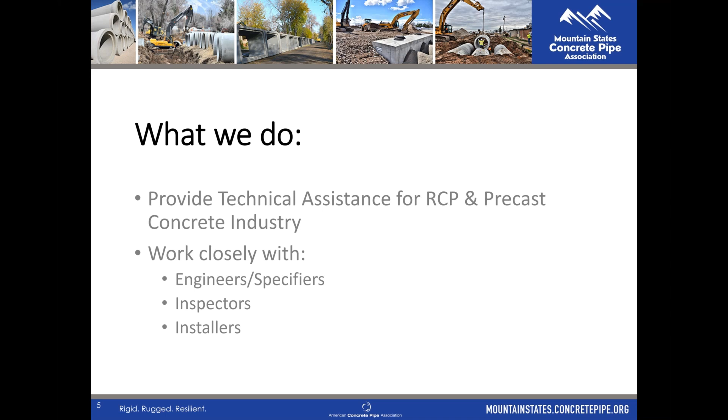We do this by giving presentations at conferences. We've been doing these webinars, and we also do in-person lunch and learns and everything. Another thing that we do is we'll review and write specifications. If you have any specifications that you think would benefit from having us take a look at it, we'd be more than happy to do that. Please reach out to us and let us know.

We also answer a lot of constructability and design questions. Sometimes I'll get a lot of phone calls of, oh, we only have like 12 inches of cover - what class of pipe, how would we do that? What would you recommend we include in the specifications in these low cover situations? It's always nice to be able to provide that information and suggestions on what to keep in mind. We want to make sure our products are being installed correctly and to the best of the contractor's ability, so we want to make sure they're doing that right. We're here to answer those questions and help you.

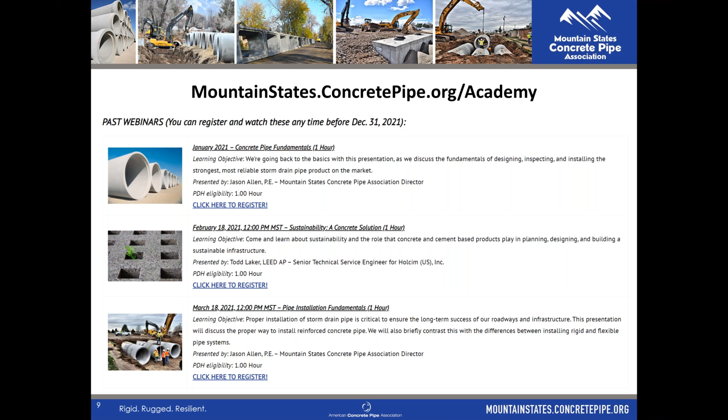So that's a really cool thing there. Before I turn the time over to Jeff, I wanted to give some fun facts about him. I like to do this with all our presenters. The fun fact I have about Jeff is he's the closest I've ever come in person to the real Ron Swanson. He embodies a lot of the values of one of my personal heroes. If you've spent time talking to Jeff, he shares a lot of views with Ron Swanson, including his love of bacon and breakfast foods. So I was going to ask what talents and traits you see in common, Jason. He loves his liberty, his guns, and his breakfast foods. Not so much the mustache though, you got a little work to do on that mustache, Jeff, but it won't be nearly that thick, I can tell you that.

I've actually been in a restaurant where it was almost played out word for word, like the scene from Parks and Rec where Ron Swanson says, 'Bring me all the eggs and bacon you have.' Stop. What you heard was, 'I want a lot of eggs and bacon.' What I said was, 'Bring me all the eggs and bacon you have.' I've actually witnessed Jeff do that at a restaurant. Sounds about right, yeah, loves his eggs and bacon.

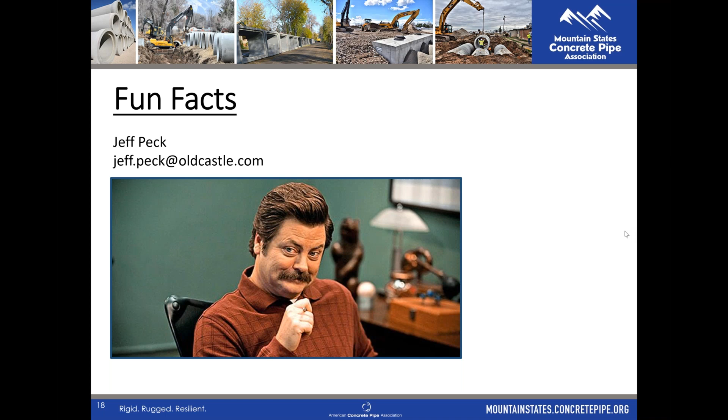Okay, so let's see if we can get this sharing right. Looks right, good to me. There it is. What do you know? Right to me. We got through it.

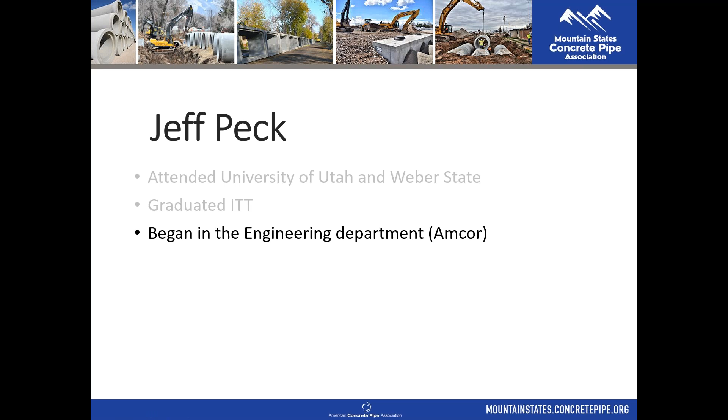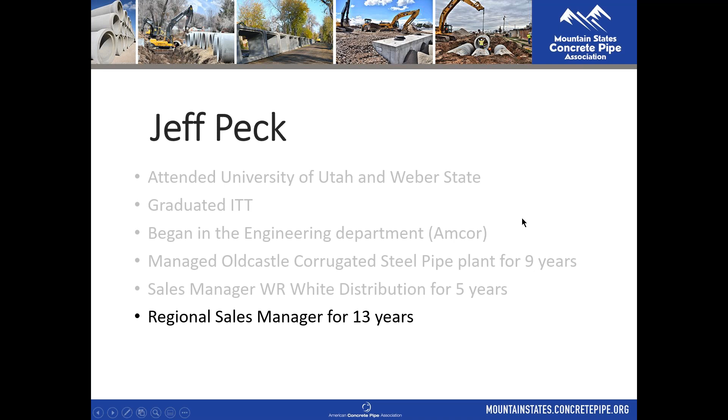My name is Jeff Peck. I attended University of Utah and Weber State, we'll leave BYU out of the conversation, we'll talk about that later. Graduated from ITT, started with Amcor. There may be some of you old enough to remember Amcor. Began in our engineering department, moved through inside sales and things like that. Actually got the opportunity to manage our corrugated steel pipe plant for 9 years, down in North Salt Lake. Many of you didn't know we had that, but I've got quite a bit of experience with corrugated metal. Then we bought W.R. White back in 2000, and I helped manage the distribution side, where we sold HDPE, PVCs, ductile iron, hydrants, fittings, all the waterworks side. So I've got quite a bit of experience with those products as well, and have been regional sales manager for Oldcastle Infrastructure in the Rocky Mountain region north for the last 13 years. So that's just a little bit about me, and I guess I missed the references to Ron Swanson, or I would have put some of my own bona fides there to be equal to the task.

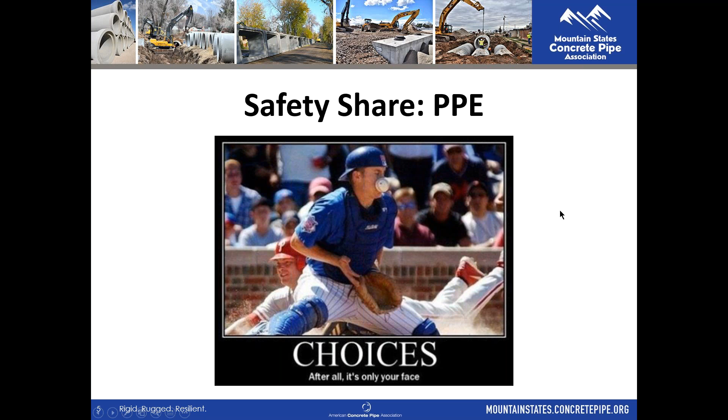Make sure that, especially in your offices, most of us here are working offices. I had an experience last week. The FedEx guy came in and dropped some packages off, and for some reason our drop-off package spot is in a hallway right in front of the front desk. So as you walk down that hall, if you're looking at your phone or not paying attention, you're going to trip over them. So obviously we want to make sure that we analyze and take care of all trip hazards so that we don't have any hardships there, and we keep our people safe. So appreciate everybody thinking about safety today, thinking safety first.

So we're going to talk about post-installation today, post-installation inspection. We're going to really focus on 3 different aspects: pipe installation, installation of rigid and flexible pipes. They are different. They need to be installed differently. And that is where we lead into the inspection, whether it be during installation or post-installation inspection.

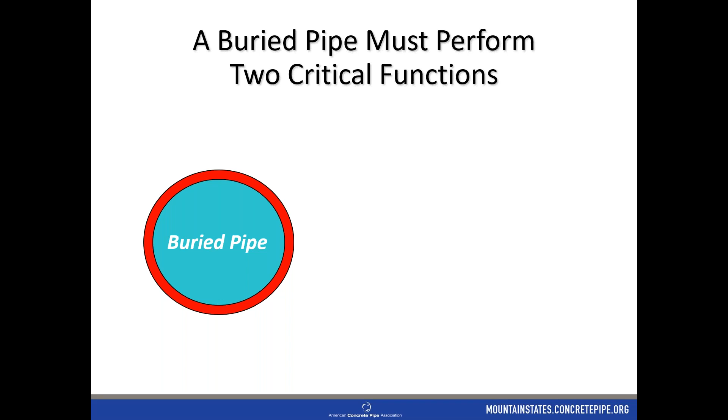We're first going to step into pipe types and installation. A pipe needs to perform two functions. The first one is it has to be a conduit. It has to be a method, not a structure, but a conveyance of water. It has to be able to line and convey water like a liner. And it also has to provide a structure to maintain that conduit shape and form so that it performs the way that it was designed to move that water. You can imagine if we just put a plastic sock in the ground, that would be a great conduit, but that wouldn't give it structure and wouldn't be able to withhold and withstand the soil loads and the live and dead loads that are being influenced on that pipe. So we have to do two things as a pipe: provide a conduit and a structure.

Before we jump into this, let's do a poll question real fast. This is kind of a review from our installation class that we did a few months ago, so let's see how many people attended that and saw that. I'm going to launch this first poll. I've got 2 poll questions we're going to do, and we're going to do them quickly.

The first one is regarding structural pipe zone. We talked about how important the structural pipe zone is, and we have to have a structure. So what is that for reinforced concrete pipe? Is it the pipe only, the bedding pipe and compacted material, the spring line, or bedding pipe and compacted material 1 foot above the pipe? Go ahead and choose now.

We'll let you vote. If you're having trouble voting and it won't let you click on one, minimize or maximize your screen, change the screen size. Sometimes, depending on the browser, it'll have some issues there. Looks like a little over half have voted, so we'll give it about 15, 20 more seconds here.

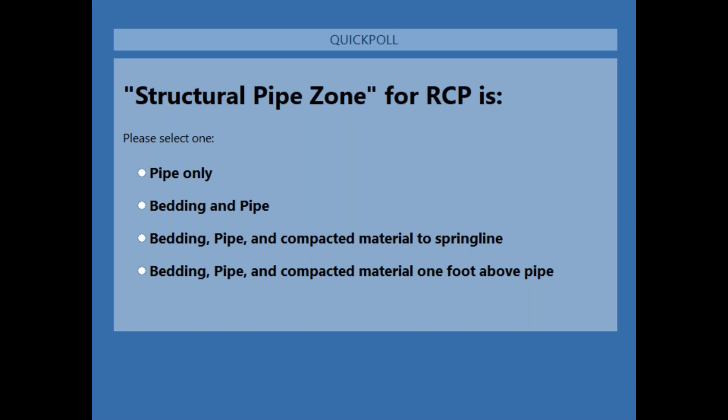All right, Heather, we're going to go ahead and close this, and I'm going to share the results here. It looks like over half said bedding pipe and compacted material to spring line. About 30% said bedding pipe and compacted material to 1 foot above pipe. So, Jeff, for structural pipe zone for RCP, which is the correct answer? Up to spring line. Yes, that is correct.

Okay, now let me launch the next one. We're reviewing, we're talking both types of pipe, and we have to make sure we're getting these right. What about for flexible pipe? That's for your corrugated metal or plastic pipes. What is your structural pipe zone for flexible? Is it the pipe only, bedding pipe and compacted material to spring line, or bedding pipe and compacted material 1 foot above the pipe? We'll give you a few seconds to do that one.

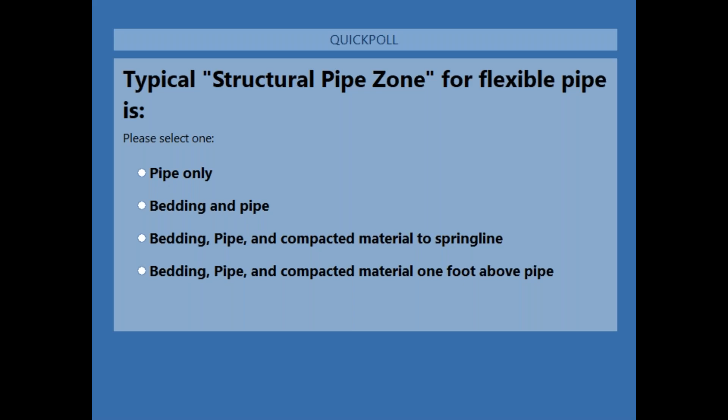Okay, so it looks like 86%, wow, overwhelming majority said bedding, pipe, and compacted material 1 foot above the pipe. And then a couple said bedding and pipe, or bedding pipe and compacted material to spring line.

Jeff, you mentioned you worked in the corrugated metal industry for a hot minute there, a hot 9 minutes. So what's the answer here for flexible pipe? Corrugated metal, plastic, thermoplastic pipes. What is the structural pipe zone for flexible pipe? The phone a friend worked out great. It is 1 foot over the pipe.

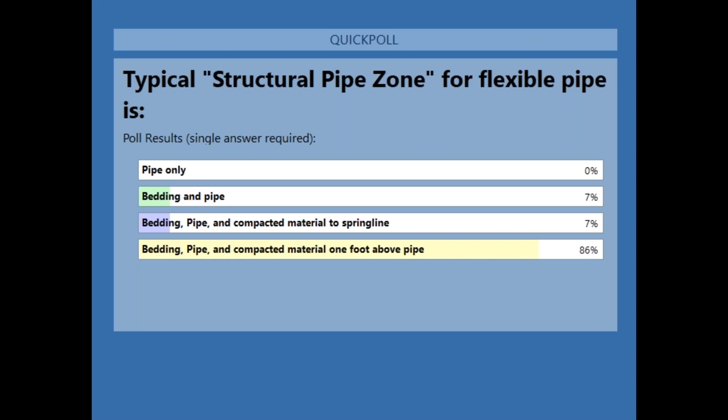Compacted area, minimum typically, right? That's typically your minimum, yeah. So depending on the diameter of the pipe, sometimes it might be a little more, but that's pretty typical. Okay, well perfect, excellent. I will turn the time back over to you then, my friend.

All right, sounds great. And I guess at this point, some folks on the call may or may not understand what the difference is between a rigid and a flexible pipe. A rigid pipe would be a concrete pipe. Flexible pipes are the HDPEs, PVCs, fiber reinforced, and ductile and cast iron are actually classified also as flexible pipes. So those are the differentiations there between those two pipe types.

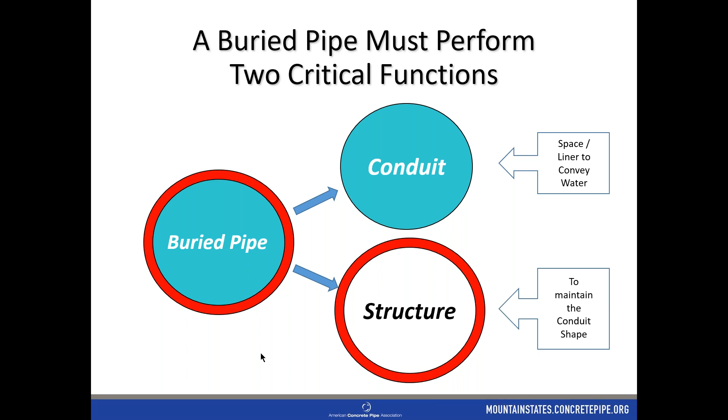So we move on and we talk about installing flexible pipe. We come into this situation where we find that some specifications want to treat them the same and allow them to be installed the same. But both of them have very different installation techniques and requirements. So those definitely need to be studied and implemented into your specification for whichever city or entity you represent.

Flexible pipes are flexible by nature. The loading will come down on top of the pipe, and the natural forces of the bedding will push back with that same force, and the flexible pipe will want to bow and expand out and deflect. It's up to the soil on the sides of the pipe to resist that deflection force. So it's very critical that we layer, do our compacted layers and compact them to the required amount by specification, so that when that deflective force starts to push the pipe out, the side soil pushes back with enough force to maintain the round shape or the integrity of the pipe that's been installed. So that backfill around the pipe is very critical.

When we look at rigid pipe, the structure comes on the truck. So when those forces are pushing down on the pipe, that pipe is transferring that force back down into the bedding material. And really, you need to make sure that you're compacting along the sides of a rigid pipe to make sure that soil maintains its height, so that you don't end up with any dips in your road. So you do need to make sure they compact enough to maintain structural integrity of the road or whatever's on top of it, but it doesn't need the compacted layers that flexible pipe do.

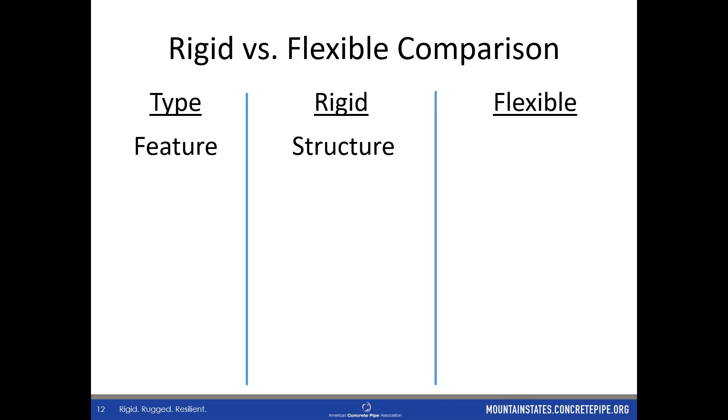So when we compare rigid to flexible pipes, when we look at a feature, the rigid pipe is a structure. As we talked about before, it needs to be a conduit and a structure. And a flexible pipe is really just a liner or a conduit and requires soil to create the structure around it.

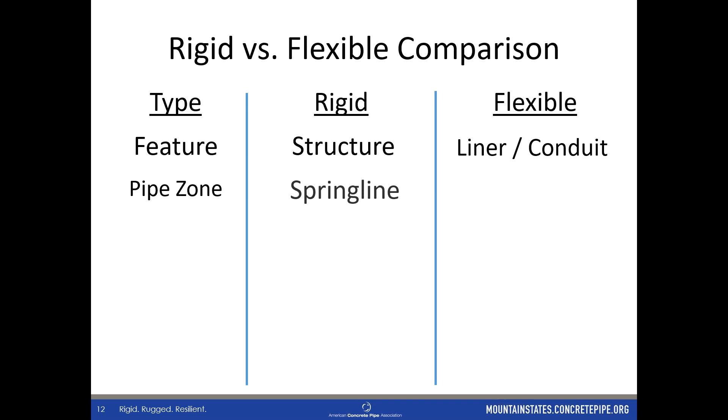The pipe zone, as we talked about earlier in our poll, rigid pipe can be backfilled and compacted up to the spring line. Flexible pipe needs to be compacted in layers, even lifts, evenly balanced on the two sides of the pipe up to at least 12 inches over the top of the pipe.

Lift thickness really is not specified either by ASTM or UDOT. There probably are different specifications. There's probably people on the phone today that may have some specifications for a rigid pipe installation that would be specific to their city or whoever they're representing.

Flexible pipe under their specifications has to be installed in 4 to 6 inch uncompacted lifts and then compacted, and that needs to happen evenly on both sides of the pipe as they come out.

The structure for a rigid pipe is built in the plant. We actually build the structure and put it on a truck and deliver it to your job site. For flexible pipe, that structure needs to be built in the field, in the trench with the soils.

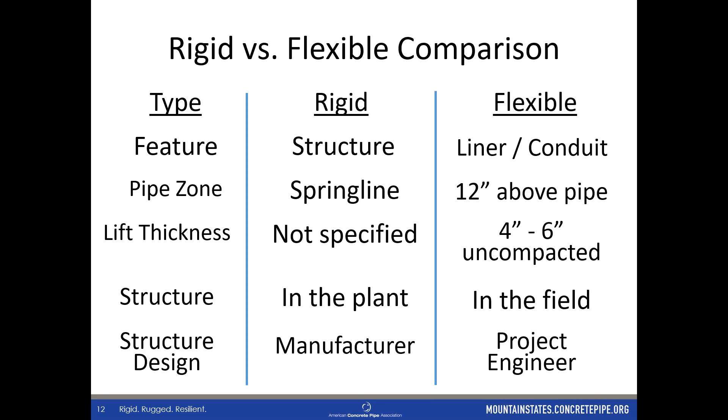Structural design for rigid pipe is actually taken care of in the plant, either by specification or by the engineer at the plant. So those people that provide rigid pipe take the responsibility of creating that structural design. When you deal with flexible pipe, by their specifications, typically that structural design has to be performed by the engineer of record or the project engineer designing the project.

So that's installation. We'll move on to some of the modes you're going to find as you install pipe, both rigid and flexible. Things we need to know are that concrete will crack. It's very common, I don't think that's a surprise to anybody on the call today. Whether you own a driveway or you've seen concrete pipe, you will get cracks in concrete, and flexible pipes will deflect, and that's what we've been talking about. We'll talk about a few of those modes.

Before we talk about what's acceptable, why don't we quiz them, Jeff, and see if they know. Quiz them, let's quiz them. Let's see how much people remember from last year when we did this presentation.

So the first question is: per ASTM C76, which is our manufacturing spec that specifies what cracks are acceptable, what is an acceptable crack width? Is it 0.001 inch, 0.01 inch, 0.1 inch, or 1 inch? Go ahead and vote now. What is acceptable, meaning it doesn't require any additional work or repair.

All righty, looks like we've got everybody voted who wants to. All right, let's share the results here. Some said 0.001 inch, 66%, two-thirds, said 0.01 inch, 24% said 0.1 inch, and nobody said 1 inch. That's probably good, a 1 inch crack on a 15-inch pipe is probably a little bit big.

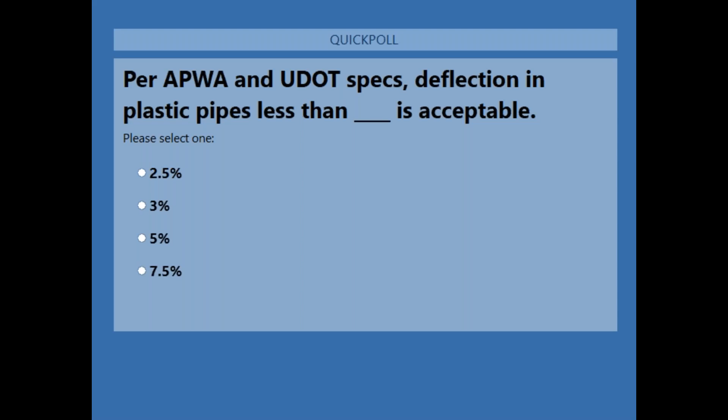Plastic pipe, like HDPE or polypropylene, the way it's written in APWA and UDOT is anything under 5% deflection is acceptable. So theoretically speaking, 3% and 2.5% are also correct, but anything over 5% per APWA is not acceptable. It's a remove and replace.

In UDOT, between 5 and 7.5%, you need a letter from an engineer. You need to do a structural analysis and review it to make sure it's acceptable. Anything over 7.5% in UDOT is not acceptable. But yes, anything less than 5% is acceptable, so technically 3% and 2.5% would also be correct.

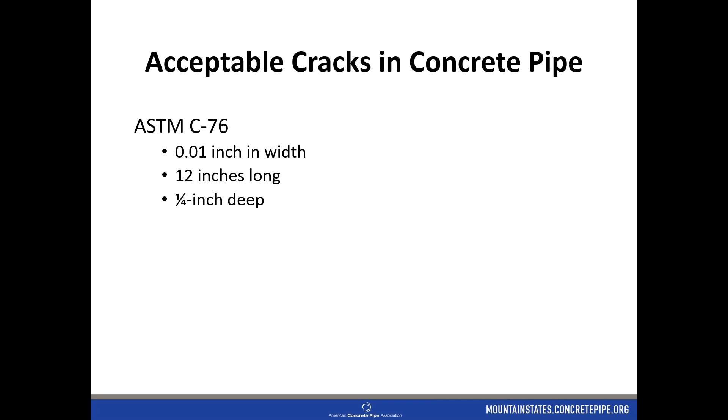Okay, so what is acceptable? Let's start with concrete, cracks in concrete pipe. Jason just went through that, so we'll roll through this fairly quickly. According to ASTM C76 for concrete pipe, a 0.01 inch crack in width, greater than 12 inches long, 1/4 inch deep - if you can take a 0.01 inch feeler gauge, like your old spark plug gauge, and put that in, if it can go down 1/4 inch and it's greater than 12 inches long, then we have what we would specify as a 0.01 inch crack.

Anything greater than that, we'll talk about here in a bit, but that's our 0.01 inch crack definition. UDOT and APWA refer to these as hairline cracks, and they ask that you evaluate cracks anything greater than a 0.01 inch crack. So what is a 0.01 inch crack?

Well, Randy Wallen went out, and there's probably some of you in the audience today that actually have Randy Wallen's business card. Hold on to that because it's a great crack gauge - probably what it's useful for now. He went out and looked at this pipe, and I don't know if you can see that crack. This is a very fine hairline crack in this pipe that really didn't meet that threshold.

We could not get a 0.01 inch gauge in there at 1/4 inch. These are the kind of cracks that are acceptable by specification. These cracks aren't going to offer any problems for you down the road under normal conditions. But if you did have Randy Wallen's business card, you could use that as a crack gauge. I looked it up, and a cardstock business card is 0.016, so it's barely over a 0.01 inch crack feeler gauge. So there you go, Jason, little tidbit - that's what Randy's business card's good for now.

I know when I've shown this picture in the past, Jeff, you can see that little chip off of the bell there, or the spigot end there. That is actually a pipe that was removed because in the video, when they saw it, the owner was nervous about that crack. So when they pulled it out and looked at it, it turned out it was less than - that was actually damaged while they were removing this piece of pipe and putting in a new one. Then when they pulled it out and measured it, they couldn't even get a feeler gauge in there. So be aware of that when you look at these videos, that sometimes it may look really big depending on what kind of lens they're using on the crack videos, but they pulled it out and realized, wow, that doesn't even come close to 0.01 inch.

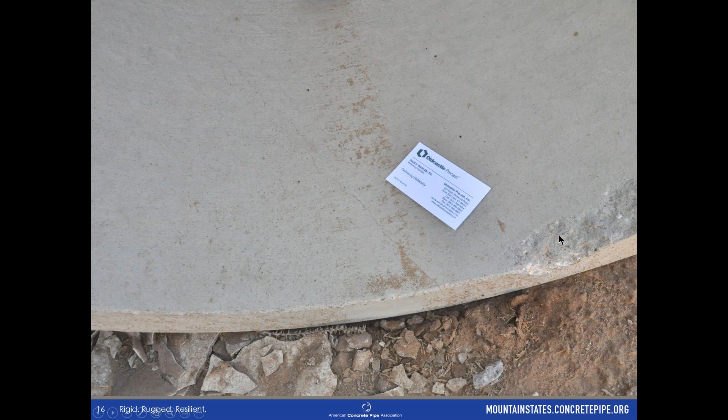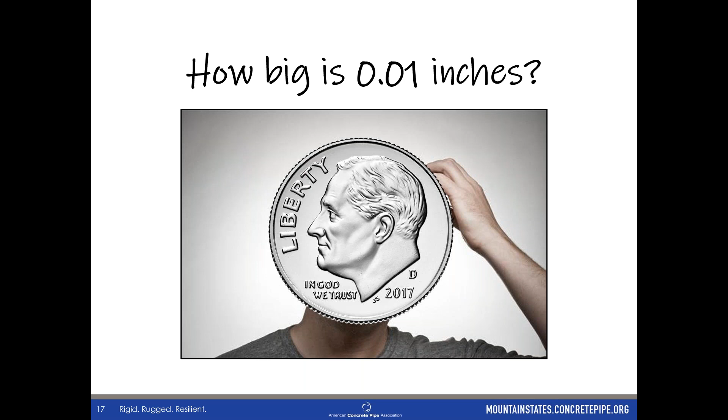So you're going to ask yourself, how big is a 0.01 inch? Well, if you reach down in your pocket, if you still have coins - in this environment we may or may not have coins in our pocket - but if you have a dime in your pocket, that dime is about 0.05 thick. So you can just imagine pounding that dime down to 20% of its thickness. That's your gauge, so you can kind of get a feel for that.

And for those of you in the audience that are - I apologize if I'm going to slaughter this - the numismatist... you say it, Jason. I want to make sure I don't get it wrong either. What was it? The numismatist is a coin collector?

So those of you that are coin collectors out there, if you wanted a reference as to what the other coin thicknesses are, there you go. If you're really looking at a 0.05 inch crack, which we'll talk more about, that dime is going to be a pretty good representation of that.

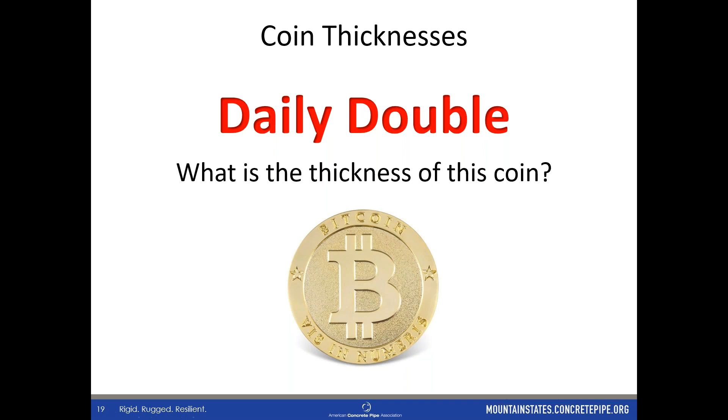$50,000, he says. $50,000 thick. I like it, that's pretty. I think that is pretty darn close to the going rate of what that is right now, and how dense that coin is at this point. If Lance is on the call right now, we would do the world according to Lance, and Lance would say that's a win. So we have a winner. That was my first choice, there was Lance, and unfortunately he couldn't make it today. So well done, Dexter, $50,000 thick. Yes, correct, well done sir. So between Jason and myself, we'll get you a fabulous cash and/or prize. Thank you for participating there.

So rolling over into the flexible pipe arena, what is an acceptable deflection there? With APWA, for all HDPEs and polypropylenes, 5% max, corrugated metal at 7.5% maximum deflection. UDOT requires anything less than 5% is acceptable. Anything between 5 and 7.5% you would evaluate, take a look at that and decide what to do, and anything greater than 7.5% would be rejected. There's some reasons for that.

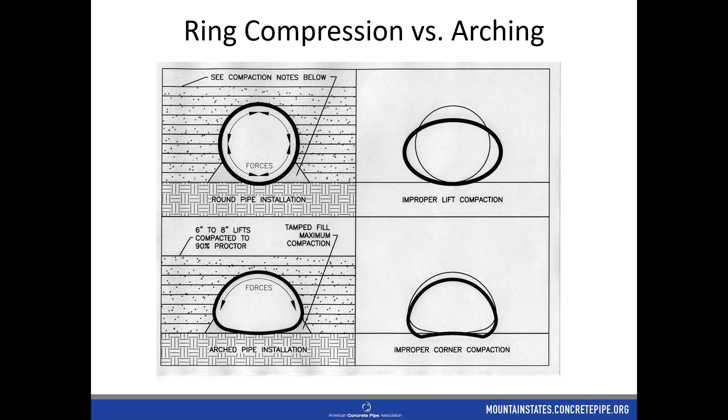Coming from my corrugated experience, we deal with ring compression theory, and that is when the soil's pushing down on the top of the pipe, that force is being transferred through the wall down to the bottom of the pipe, and that's being pushed back. So if I'm pushing down on the top and the bedding soil is pushing up with its natural force, those sides want to push out, and the soils have to resist that wall wanting to push out. If we get to a situation where we start to deflect a lot, we end up not really dealing in ring compression anymore. You're dealing with an arch where the soil in those corners at the bottom of the top arching portion would have to support that load, much as a bridge would, or footings on a bridge or an arch culvert, something like that. So that's when you start to get that transition of design and really how it operates in the soil.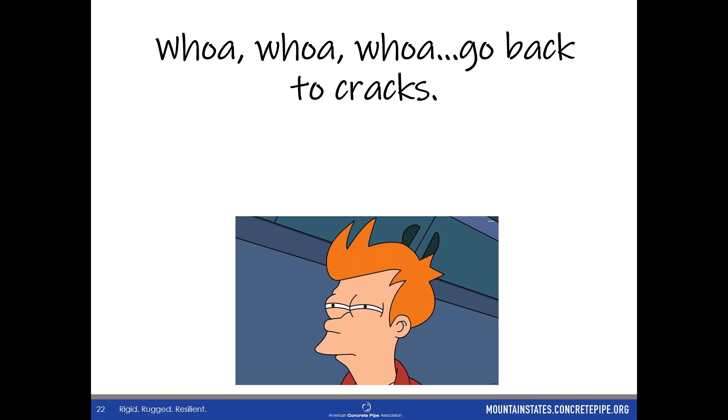Wait a minute, some of you are saying cracks. You were talking about cracks. Can't we talk about cracks some more? Why is any crack acceptable?

Well, cracks can be divided up into a couple of categories. We'll talk about functional first. Functional is, does the crack impede or influence the ability of that pipe to perform its function? Is the crack such that some of the material has been dislodged and is creating an obstruction in the flow? Is some of the material missing?

Are we getting leakage through the pipe that may be affecting the backfill material? We certainly don't want anything that's going to impede the function of the pipe, but those hairline cracks, and the cracks that are within the specification we've just discussed, have been shown through specification and testing that those cracks are not functionally a problem.

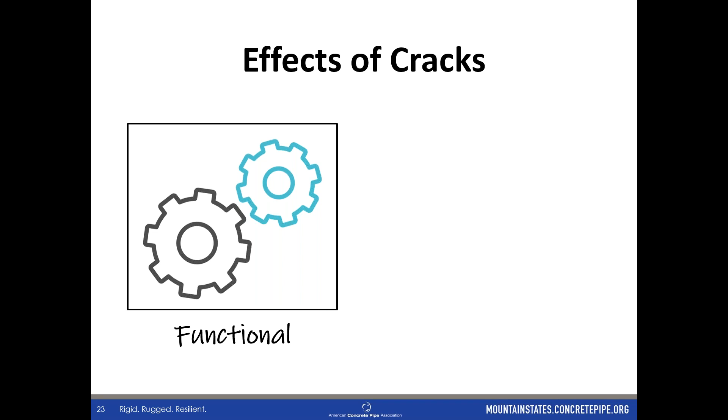The second thing you want to look at is, is it a structural problem? We're going to look at a few examples of potentially structural problems. Have we gotten into the steel, or have we removed enough of the wall that the pipe can't support itself as those forces are being transferred through the wall? So we want to be able to look at a project and a pipe out in the field and determine, is this a loss of functionality?

Is it a loss of structure? And then you're making a determination on whether you need to do anything at all, or if we need to get into some potential repair processes that we'll talk about in just a moment.

One of the things some of you may know is that concrete has the ability to heal itself. One of its properties is called autogenous healing. It's the only pipe that I know of that has the ability, once installed in the ground, to actually heal some issues it has, mainly with cracking.

And depending on the crack size, we'll get into that a little bit. I don't want to spend a whole lot of time here, because this is a presentation in and of itself. There's a lot of chemistry and science to it that needs to be explained, and we're going to kind of gloss over that, but I'll give you some references at the end if you have an interest and want to look this up.

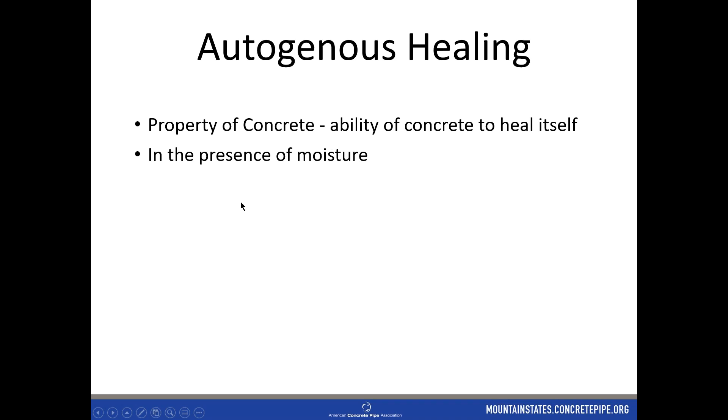So it can heal itself. You have to have some moisture involved—if it's a dry pipe, you're obviously not going to get that. But it will seal cracks and protect reinforcing steel.

Now you're going to give me this strange look—I know probably half of you are out there going, what's he talking about? But I just remember my first experience with this, and I didn't know what it was, as a child visiting my grandma. She lived up in Sugar House in an old home, and her basement was unfinished, and we'd go down and play in the basement. She had all these white lines in the crack areas of her foundation wall, and I always wondered, why would grandma come down and paint the cracks in the walls or whatever? It wasn't until I started with Oldcastle and was introduced to autogenous healing that it started to connect with me.

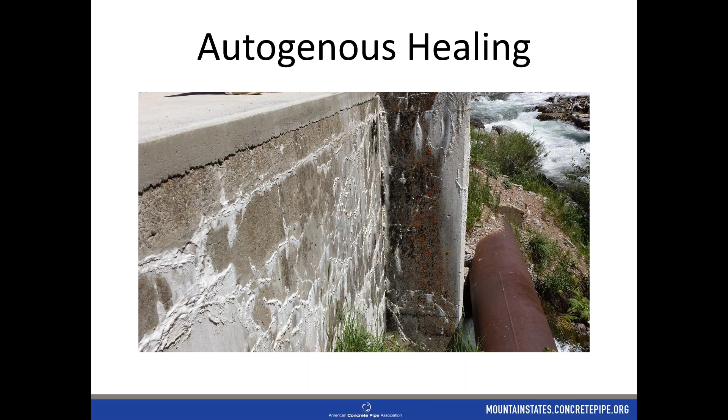This is a box that's up—if any of you enjoy the Star Valley area, if you ever hike up to the Intermittent Springs, you hike right by this box and you've noticed it. It's a very old water vault that comes off the stream to supply water down to the valley. It's struggling—it's had a lot of years of abuse and has cracked through some forces over the decades it's been here. But you'll notice a lot of this efflorescence—this is autogenous healing, and we'll talk quickly through the science there. This vault has cracked over time, and those cracks have actually healed themselves thanks to some of the environmental and internal conditions that exist.

This was a pipe that we actually provided up here in Weber County—this is a fitting we put on the pipe. There's a manhole that goes up and out of here, and you have to put those two pieces together with grout to get a manhole to stick on top of a pipe so you have access into the pipe. We had very high groundwater when we installed these. We had water coming through some of that patchwork where we were tying those two structures together—even just pouring water coming out of this when it was first installed. This is within about a week and a half of installing that, noticing these leaks.

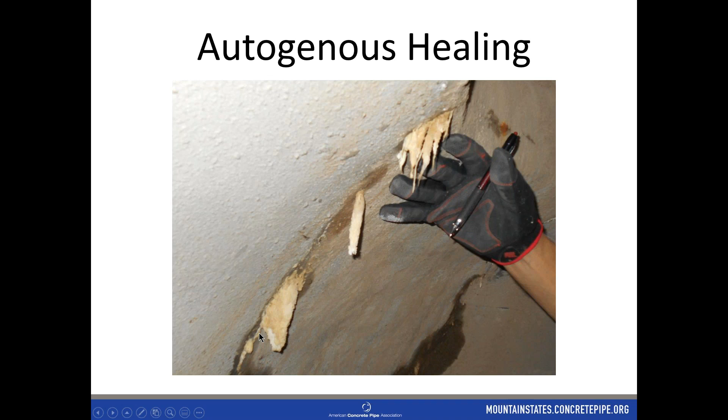We came back in to see how it was coming, and you can see all of this efflorescence and these stalactites coming down through the concrete. This is the calcium carbonate being created with the water and the cementitious material. You can see a very live version of that chemical reaction there, and the healing. Notice we don't have any running water here anymore. We have some damp spots, and within another couple of weeks, those damp spots even disappeared.

So the science behind it, really quickly: free calcium oxide in the cementitious material, and calcium hydroxides are liberated as water is introduced, creating a hydration of the tricalcium silicate. Carbon dioxide in the air, inside the pipe, in the soils outside, or even in the water going through the pipe supplies this chemical reaction. That's constantly being fed, and through that process it carbonates the calcium oxide and calcium hydroxide, creating calcium carbonate crystals, or limestone.

That's what we saw in the picture previously, that calcium carbonate actually leaching out. It was filling that crack, but there was so much being produced, and the water was bringing so much of it out, that it actually created that buildup outside the wall of the pipe that we saw.

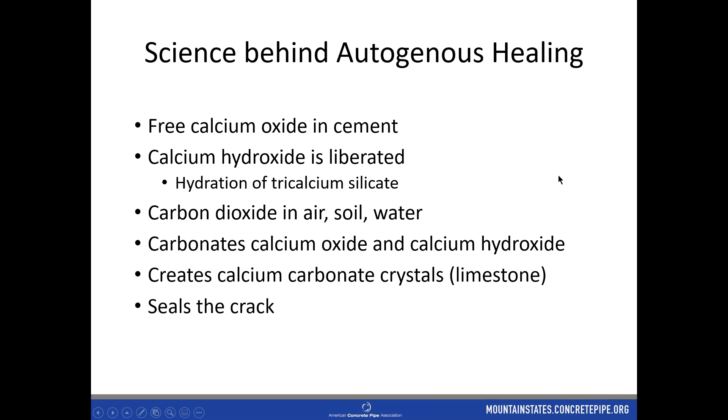It seals those cracks. This is Jason's slide for all of his chemistry nerds out there - whoop, whoop, everybody put your hands up. Calcium hydroxide, add carbon dioxide to it, we end up with calcium carbonate, and water is the outcome. So that's just for our chemistry folks out there.

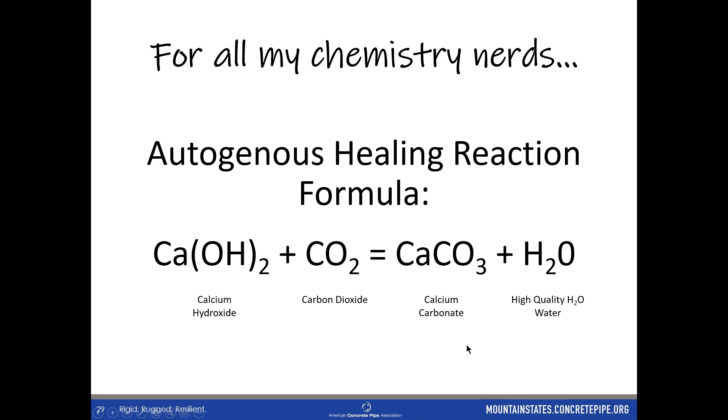We have presentations that can explain this more in depth if you have more time at some point and have some interest.

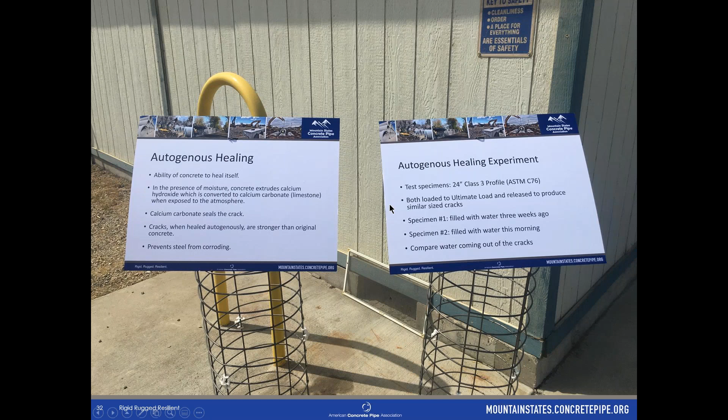You may ask, how long does it take? We asked ourselves that a couple years ago here at the Mountain States Concrete Pipe Association. We had some customer appreciation lunches that coincided with the American Concrete Pipe Association Pipe Week. Both plants, the Geneva plant and the Oldcastle plant, went out and cracked some pipe on purpose.

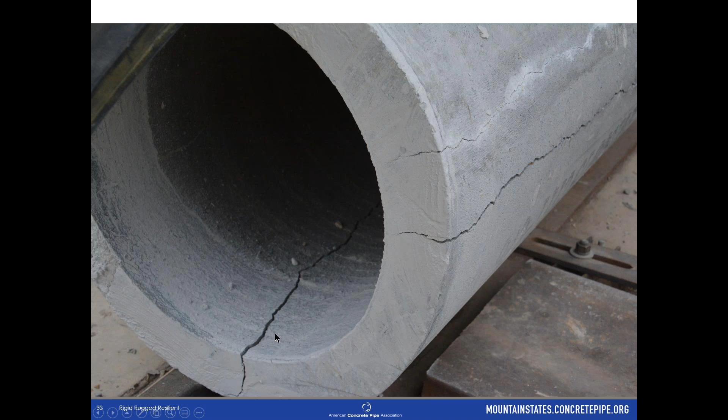We put this in our D-load machine and crushed that pipe until we opened it up - I can only speak for Oldcastle - we opened that pipe up to about 2/10 of an inch. Then when we took the pressure off, those cracks went back to about 0.05. Then we stood them up. We cut that pipe in half, so we had two specimens, but we broke that pipe as one so they had a relatively similar crack in both pieces.

This near piece we filled with water for 3 weeks prior to the luncheon. It had a 0.05 crack in it, and it was leaking at the same rate as this one we set up that day. This is the other half of that pipe that we did not put water in for 3 weeks. We let that run to show how bad the crack was leaking on day one when water was introduced to it, and this was leaking at about an inch a minute.

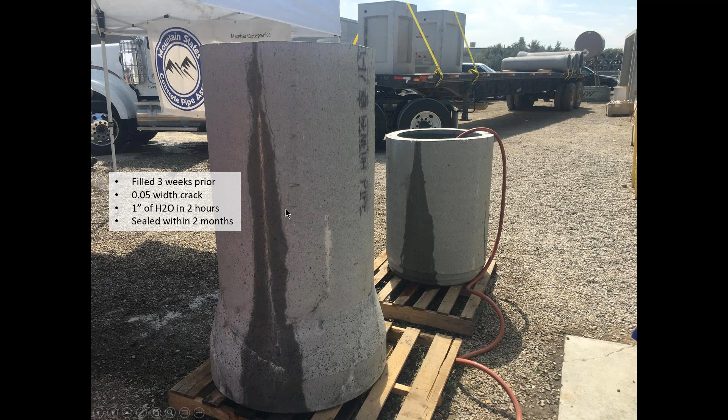And this one, after 3 weeks when it started, it was about an inch a minute of water we were losing out of it. After 3 weeks, we were losing an inch of water out of this pipe in 2 hours. And within 2 months of having water, this was completely sealed off and it healed itself. This was the new sample just to show how bad the leakage was through that similar crack.

So it's very educational for us to do it. We know it existed, but we really wanted to run a time test and really see under certain situations where gap width and water to it, how that affected those. And we were very encouraged by the results and were able to prove proof of concept for autogenous healing.

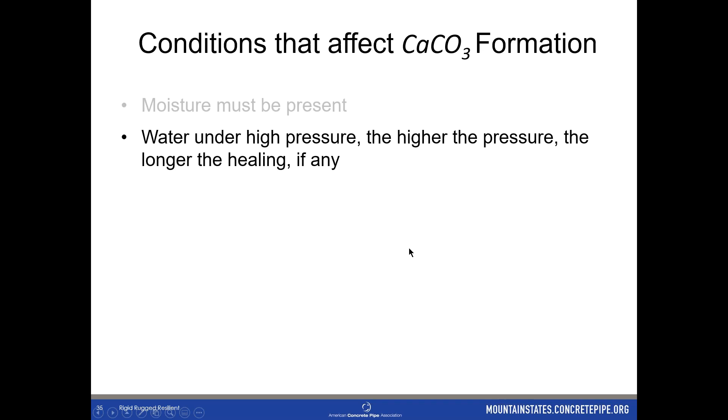So there are some conditions that affect that calcium carbonate formation. Obviously, we have to have moisture present. Water under high pressure, the higher the pressure, the longer the healing, if any. If your water pressure is too much and carrying too much water through there, it'll actually flush the calcium carbonate out. So the water flow through that crack can be a factor.

Crack width and shape, if it's a parallel crack where it's completely open, that will heal at a different rate than a V crack where it's kind of a hinged crack, touching at the bottom and open wider at the other surface or the top surface. The shape of the crack - some of these things come into consideration when we talk about how long it takes to heal.

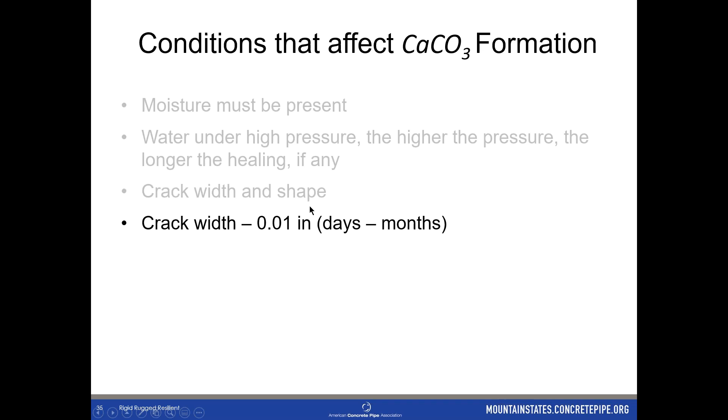Crack width, 0.01 will heal within days or months. If you get up into the 0.06, it can take up to years to fill that gap because there's a lot of space there to fill.

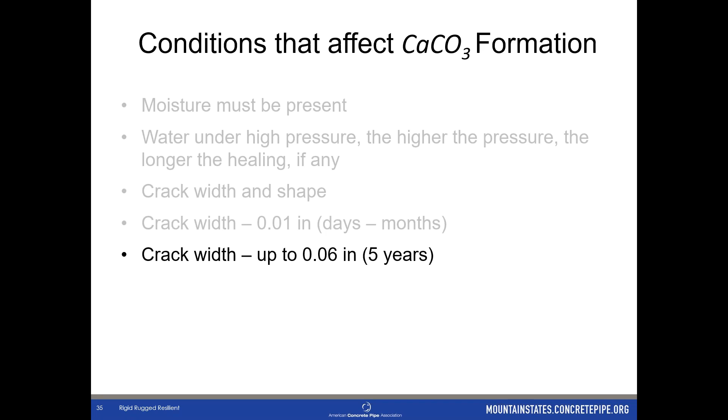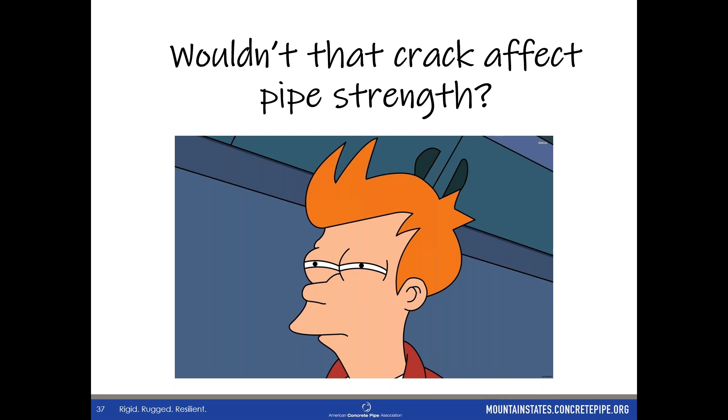So really the question - I know several of you are going, well, that crack, it's going to heal itself, but it's weaker there, right? And we actually found that not necessarily to be the case. We took that piece of pipe that healed itself, put it back in our D-load machine, and this D-load machine just basically crushes this pipe. And actually, we tried to orient it in the same orientation that we had before, it actually cracked in a different location, did not crack our healed portion. So again, that crack can actually come back stronger than its original form.

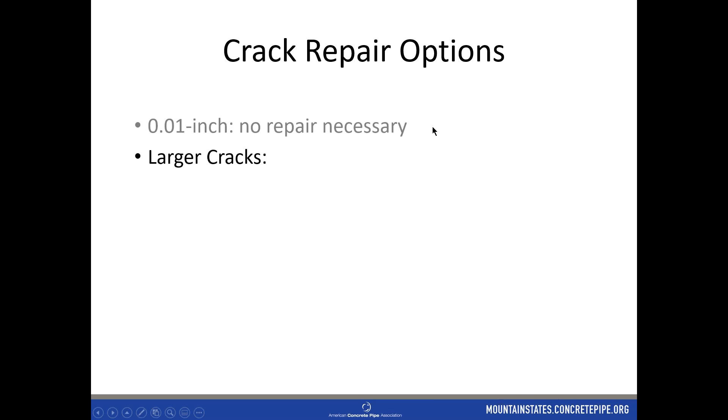So when we're talking about repair options for cracks, if we find some cracks like this, a 1/100th inch crack, there's no need to repair that. Larger cracks, you have some options like injection grouting in those situations, or you can put an internal or external grout sleeve. There are internal sleeves that will do a localized patch over cracks, or you can go out and pour a concrete collar on the outside, or you can actually come in situ form or run a liner through it to cover over those cracks. If it's worse than that, you've got a big structural situation, obviously remove and replace is sometimes that option.

Let's move on to inspection. Why do we need to do post-inspection? The benefits: to ensure the pipe meets the standards. You guys spend a lot of time trying to develop standards, and you know what you want, and you're trying to get what you want out of that system.

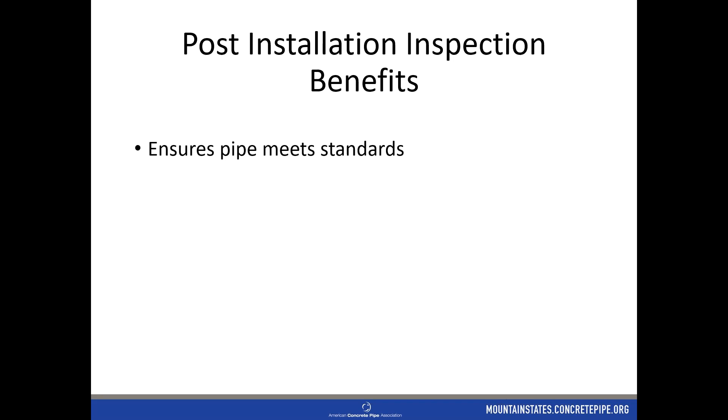Document - if you do a good pre-installation or installation, then post-installation, it actually will document the variation between the installation date and the period you test it, whether it be at 30 days or a year, depending on how you write that in your specifications. But you'll be able to see if anything's happened, if any of the bedding has settled, or if there is any deflection that happens over time, which will give you a good idea of what future performance may be. You're still within your warranty period.

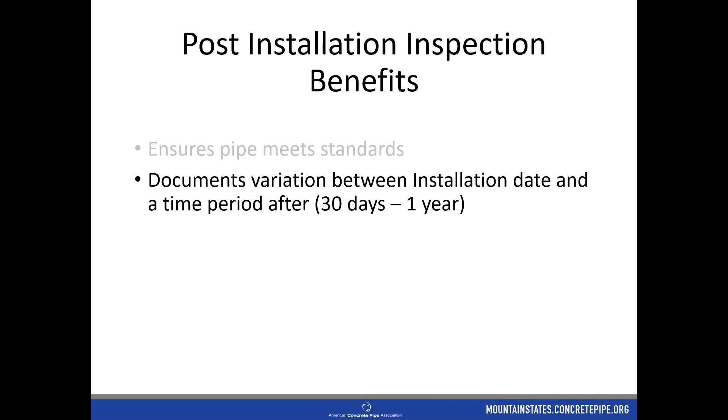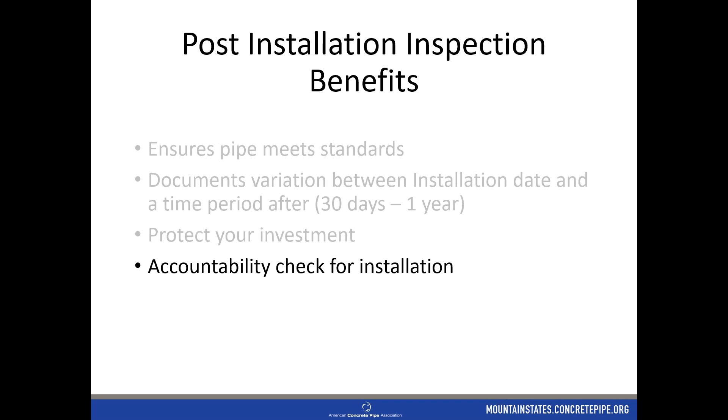I greatly encourage you to do post inspections to identify any future issues or issues you may have had with installation. It protects your investment. You guys are guardians of public trust, and it really helps protect what you wanted to put in your system. Accountability helps you keep your installers accountable, making sure they're installing as per specifications required, either by yourself or by the national specifications.

So post-installation inspection is not meant to replace inspection during installation.

Nancy Pelosi has driven that point home millions of times. I'm amazed that all of us haven't really heard that message, but it's true. And I don't even hear Jason laughing. I'm laughing because I know what picture I had when I sent you the presentation, and you swapped it out. So that's funny. I like that, I did that for you, Jason. You swapped one angry conservative for an angry liberal. I like it.

The one nice thing about post-installation, I know there's concerns, especially on the inspection side, that we don't have the time or money to go out and have an inspector at every job site all the time, especially with as busy as construction is right now. I get that's a real burden and an issue to make happen all the time. So it's tough to be out there all the time to make sure it's all happening right.

But when you do a post-installation inspection, most of the time you can actually put that in the contract. It can be a bid line item, part of the bid where that money is covered in the project, but it's also requiring now we get a third party in there that inspects everything for you. It creates that little bit of insurance that you at least know those got inspected, what condition they were in once you did that post inspection, and you can identify any problems, and if you've got to have the contractors go back out and fix anything, you can. That's where that mechanism of we don't always have the money or personnel on the front end comes in.

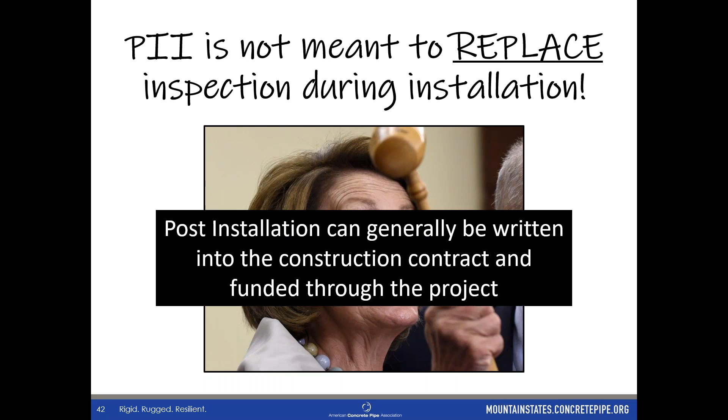We can require it on the back end, and there are plenty of companies out there that can help with that post installation inspection. Hey Jeff, before we jump into the methods, I'm curious to see.

I've got one last poll question. I just want to see what percentage of projects are enforcing post-installation inspection. I don't mean what percentage of your pipes are you checking. I'm saying with projects you're involved in, what percentage are doing any amount of post-installation inspection, whether that's mandrel for flexible, video for concrete, or video and mandrel for flexible. If they're checking any pipes at all, I want to know what percentage. So I'm going to launch that right now. What percentage of projects that you're involved with currently are you enforcing PII or have it written into the spec? 0%, 25%, 50%, 75%, 100%.

I know sometimes if you're with a city, if you have that written into your spec and you do 100% of your projects PII, great, that's awesome. If you're not, we can take a look at that and help you. We've helped cities in the past that were having issues with poor installation, and once they started enforcing PII, we noticed installation gets better. Interesting. So we'll give it a bit here.

While we're buttoning that up, I do have to apologize to everyone here that's present because it is nearly lunchtime, and I apologize for throwing angry Nancy Pelosi pictures out when everyone's trying to have their lunch. So I really do feel bad about that. I mean, yeah, you don't want people to lose their appetite. That was pretty uncouth, Jeff.

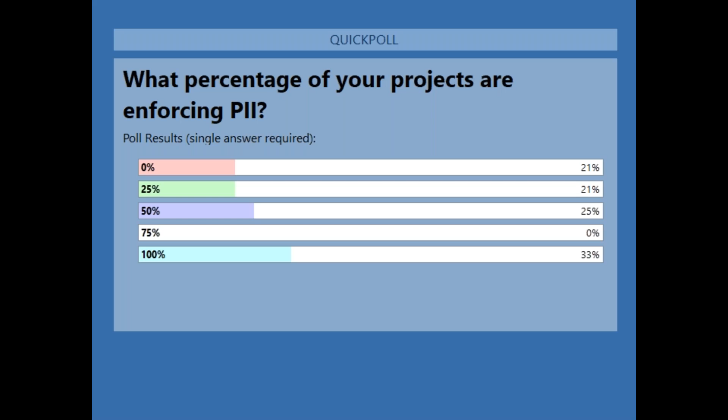So that's interesting to know. If you do have any questions, please reach out to us. If you're in that 0% and you would like to see how we've written it into other cities and helped those cities have better installations, and what that cost is, feel free to reach out to us. We'd be happy to answer that question for you. So go ahead, Jeff, you can move on with methods. Great job, Jason, thank you.

No, it's good. So options, there's obviously a number of options, especially for concrete.

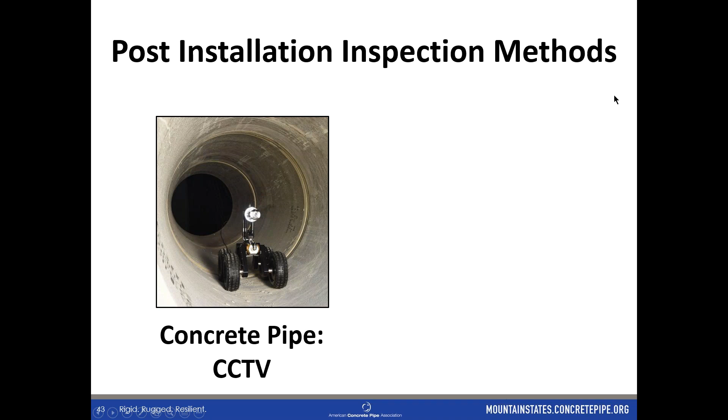We're always talking about closed circuit TV, and with flexible pipes, closed circuit TV will tell you a lot, as well as pulling a mandrel will tell you a great deal. Because it's very hard to look down a pipe - when you look down a pipe, if it's not grossly deflected, it's hard to tell. It's hard to see 3 or 5% deflection. It still looks round, but that mandrel you pull through that pipe will definitely give you the go, no go.

So on the closed circuit TV recommendations, when you're running a camera down there to inspect, please make sure and have written into your specs that they are NASSCO certified. Jason Allen is actually NASSCO certified. Ralph with our company and Randy were NASSCO certified. We sent them down primarily so that they could watch the inspectors and make sure they were performing accurately and correctly when they were on our projects.

Definitely some things you need to watch for as you're doing a closed circuit TV inspection: they need to go slow enough to see issues. We've seen videos where they're either going too fast, or they blow over something you see that they didn't see and look at. Make sure they're going slow enough to see the issues, and that they actually look at all those issues. NASSCO recommends you go no faster than 30 feet per minute. I've seen some where they ripped through so fast you couldn't see a crack or an issue if you had to.

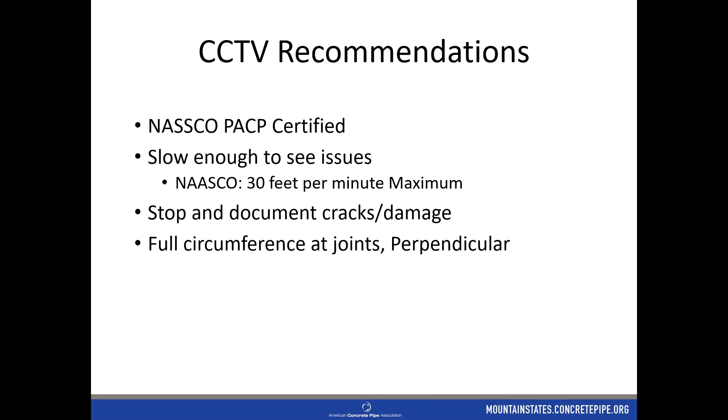Full circumferential viewing at the joints, and make sure it's perpendicular. I've seen some videos where a guy will stop an inch back behind the joint and do a circumferential, and you don't really see down the joint. You want to be able to see down the joint, see if there's any damage in the bell area, or if there's any rolled gasket - some of those things are identified. So you want a good clean shot down the joint and go all the way around it to identify issues.

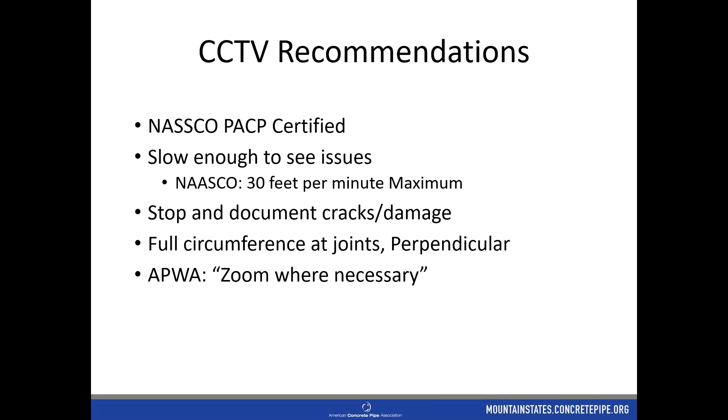APWA says zoom where necessary. Definitely zoom in where necessary when you find some issues. Any bit of information you can get out of that camera will be beneficial in deciding what you need to do with issues.

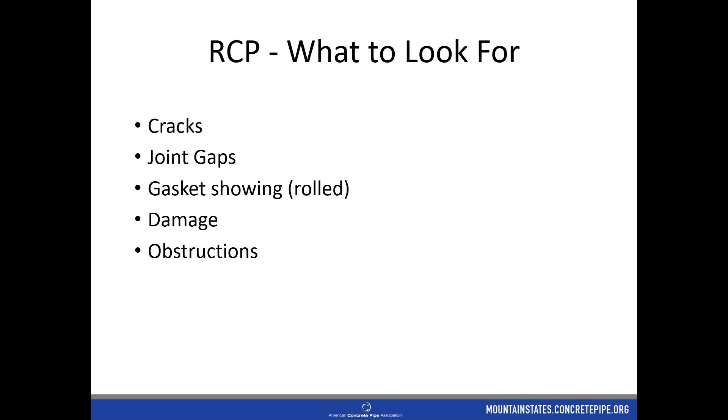For concrete pipe, what are we looking for? We're looking for cracks. We're looking for joint gaps. We're looking for gaskets showing, whether a gasket is rolled. We're looking for damage in the pipe, whether it's got chips or chunks out of it. You're looking for obstructions in the flow of your pipe - is there a lot of gravel and things that have built up through construction? And then misalignment, if you've got any bellies or snakes - have they aligned the pipe right in their installation?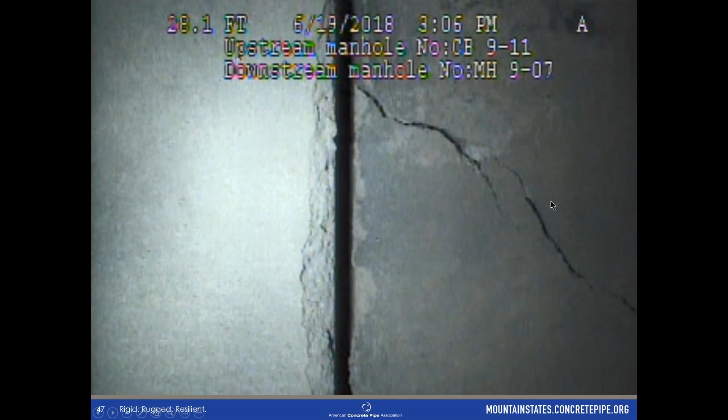Here again, another chunk - this one looks like at some point that's probably a complete chunk. Usually when you get some offsetting where those two aren't sitting at the same level, you've got a piece of concrete pipe where the crack is obviously bigger than a 0.01 inch, and if you've got some shifting of those plates, you may have a structural problem that you'll have to address.

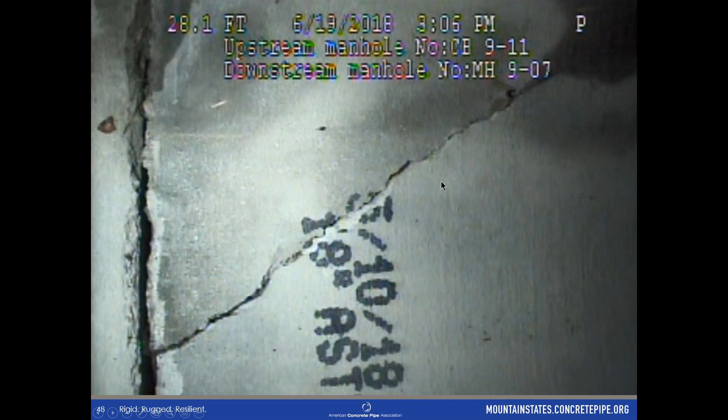And then this one, definitely a big structure where we've got the gasket coming through. There's obviously nothing holding it. They've broken the spigot, but then we also start to see the wire. Now this is really into some damage that's got to be looked at and taken seriously as to whether we're going to take out and replace it, or pour a collar around it. These types of situations would need to be addressed. And again, as Jason was always saying, Mountain States is always more than happy to help analyze these, look at them, and give our thoughts about what's happening here.

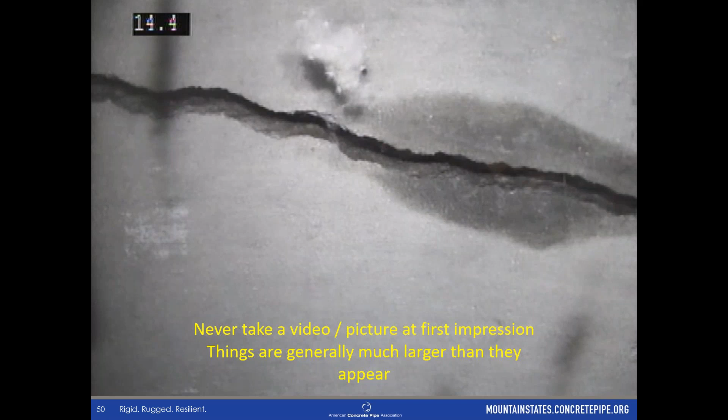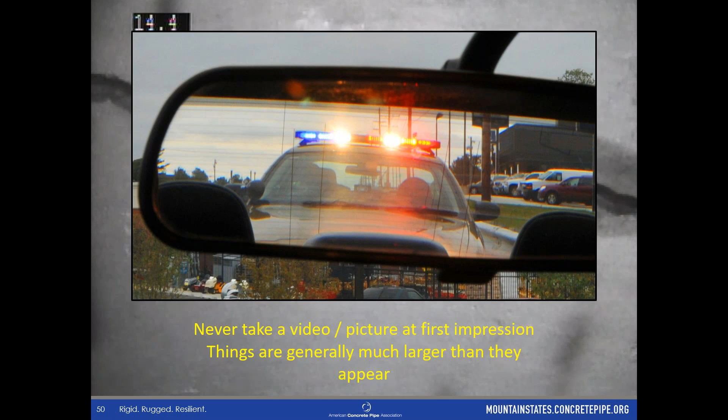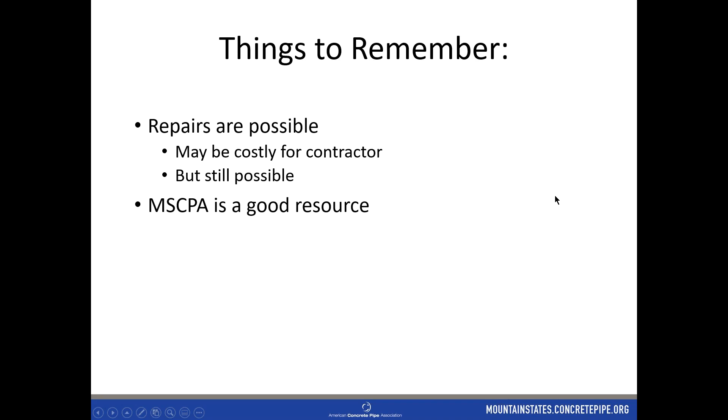So things to remember: repairs are possible, can be costly, but in almost all cases they can be handled. Mountain States is always a good resource to call and get our opinion, our help. We're as invested in this as the rest of the community, everybody on this call. We want good installations. We don't want problems with our pipes. We love it when a project comes together and it's put together right.

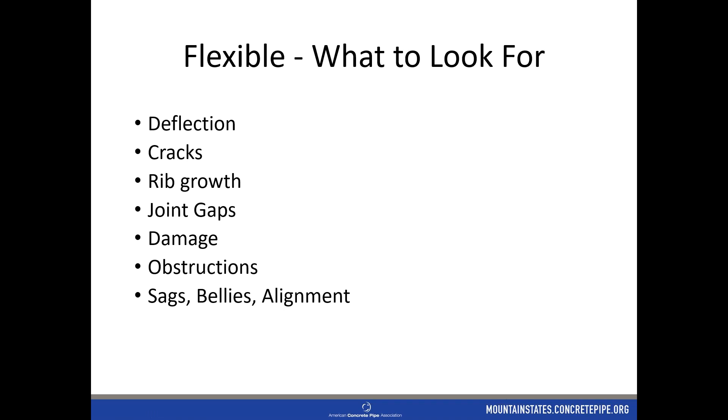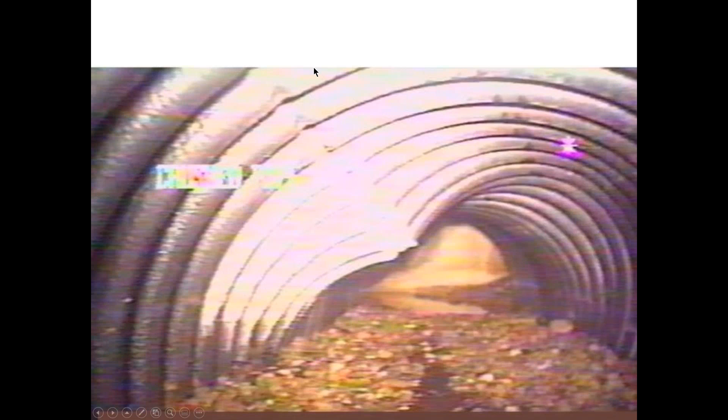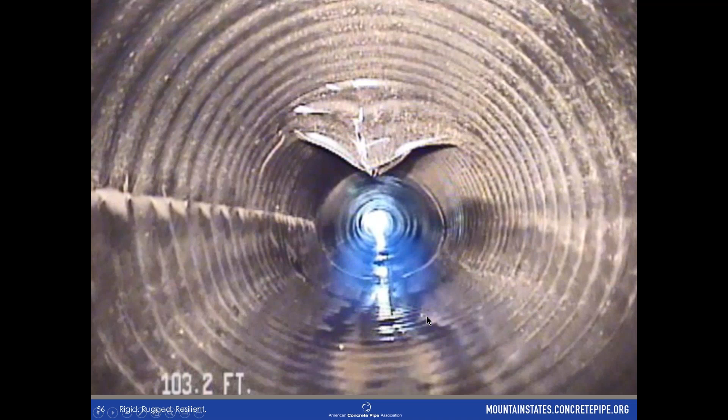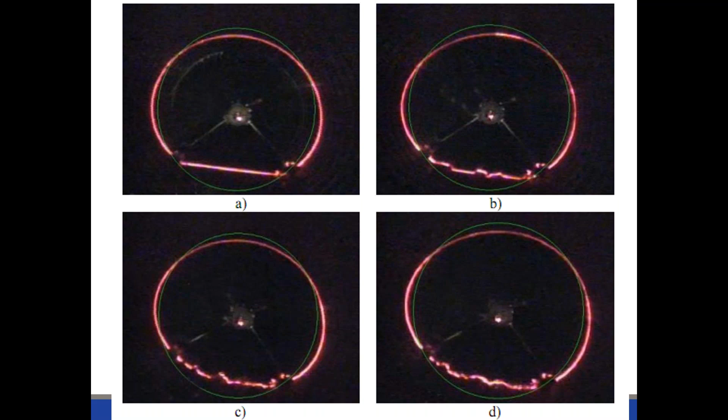The nice thing about the laser is it's going to pick up that 3 to 5 to 7 to 10% deflection that you may not see with the naked eye, especially on larger pipes. It's hooked to a computer program that will spit out exactly how far it is deflected. Really good system, but again, it's going to be pricey, and hopefully that becomes more prevalent and the prices start to come down.

So just in closing, I don't know that we really have takeaways, but really making sure that things are installed correctly, making sure your specs identify the differences between a rigid and a flexible pipe installation. Make sure our inspectors understand the differences and what to watch for, and make sure we have post-inspection so that we see our installed product is what we actually asked to be delivered, and identify any problems and take care of those before they become a real problem.